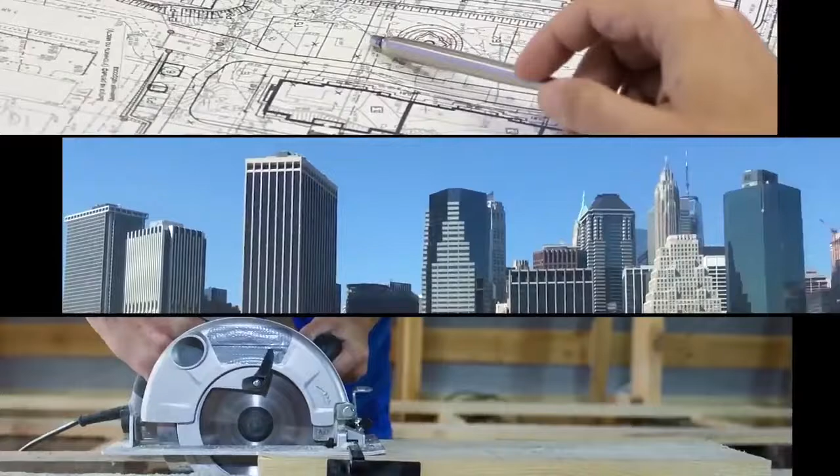In the United States, local governments, businesses, and individuals are working on inventive ways to curb carbon emissions in an often overlooked place, our homes. Zach Semke works at NK Architects, a company that specializes in a cutting-edge, energy-efficient building technology called Passive House. I'm a very active proponent, I guess, of Passive House because it's just clear to me that it's a very powerful way to transform buildings into a form of climate action.

In the clean energy space, we're seeing solar panels and wind just plummeting cost and performance rising really rapidly. We need to take a cue from that and harness science, essentially, to build better buildings. And that's what Passive House does. In order to meet the Paris Accord targets, we need to flatten out emissions by 2020 and then see emissions reduced by half every decade afterward.

The Paris Climate Agreement pledges to limit the rise in global temperature to well below 2 degrees Celsius. This ambitious goal will require a lot of cooperation, determination, and innovation. Reducing energy use in buildings will play a major part in this. According to the United Nations Environmental Programme, buildings use about 40% of global energy.

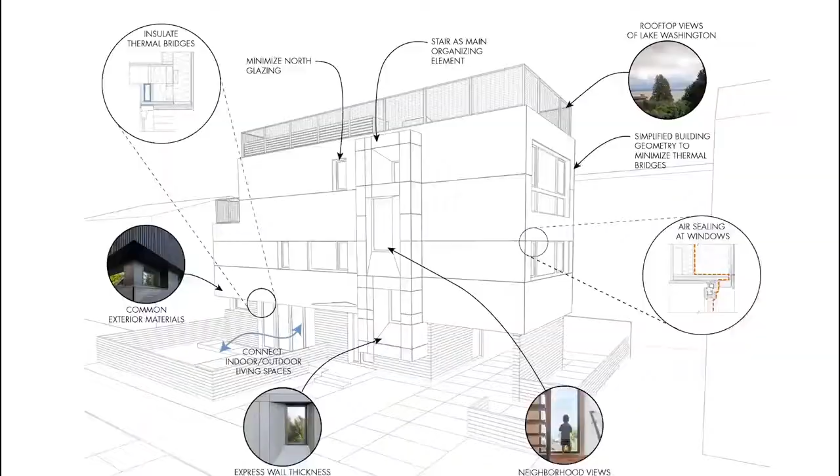Blocks the sun. I am an environmentalist. I was an engineer for about 10 years. I have been now in construction for about 10 or 11 years. I like to work with my hands, and I like construction a lot, and wanted to take it to sort of another level, to really do something meaningful in the community.

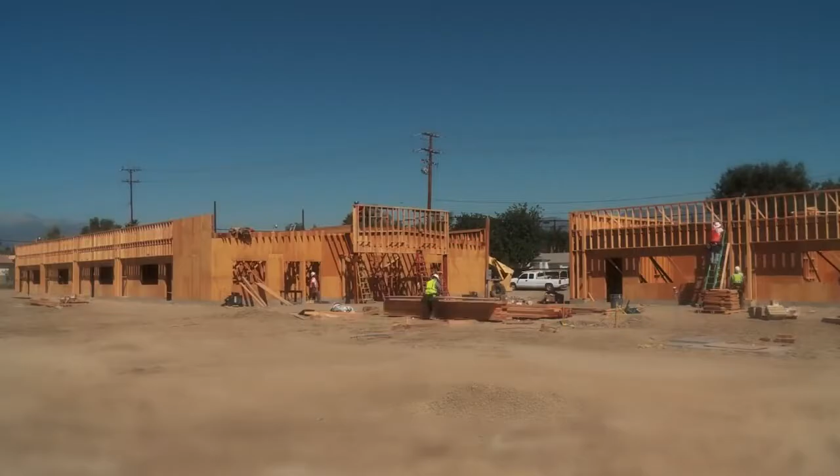Once you build a house, hopefully it's going to last for a very long time, and you kind of have one opportunity to really fix the energy consumption of the house. And you lock in that energy consumption for 100 years. And so for me, that was a very compelling idea. So we decided to do this house that way.

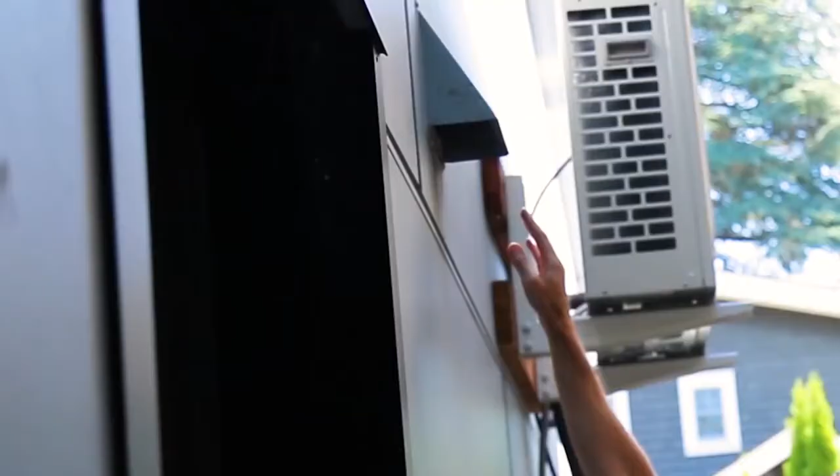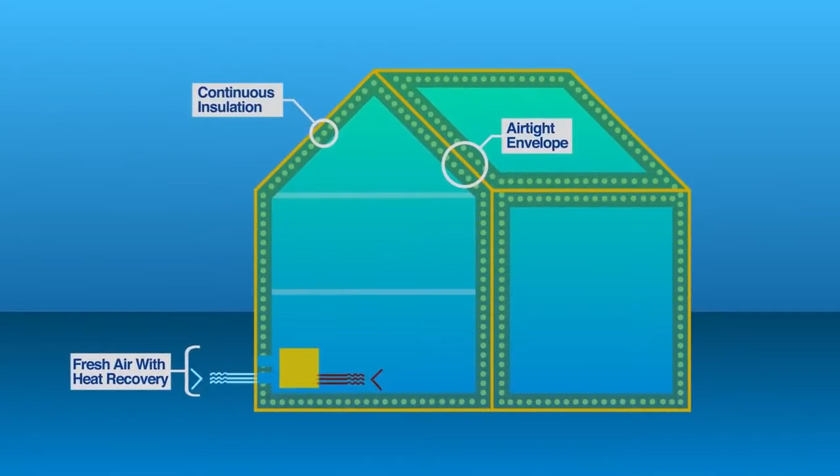So it is an airtight house, and so we have continuous ventilation. So we're delivering fresh air to the house all the time. A passive house uses what's called a building envelope to heavily control the air that gets in and out of a building. That means a super thick layer of insulation everywhere. Might be a little challenging to film in here.

So this is the heat recovery ventilator. It's bringing in incoming fresh air from outside, and it's filtering that air. So this is delivering fresh air to the house continually. Having continuously filtered fresh air takes the allergens out of the air, takes toxins out of the air. And I think the other part of it is it's much more comfortable.

Like in our old homes in the winter, you would be running the heat pretty constantly, and you would be bundled up. And so for us, we can just have on a t-shirt and a pair of jeans and flip-flops in our house all year round.

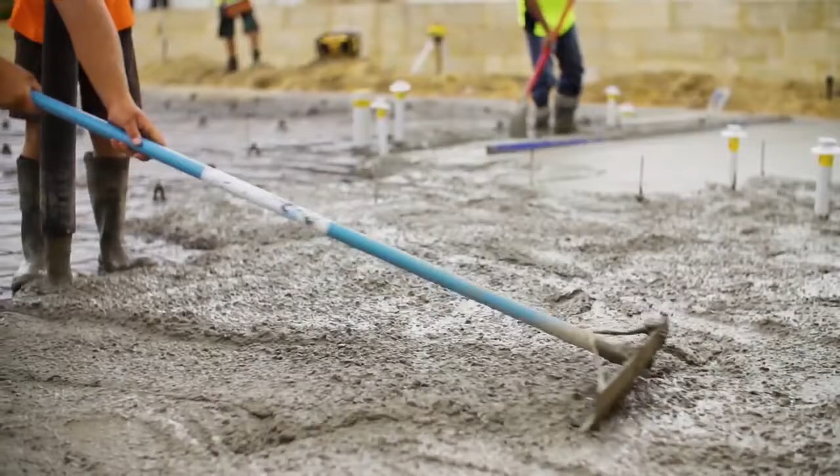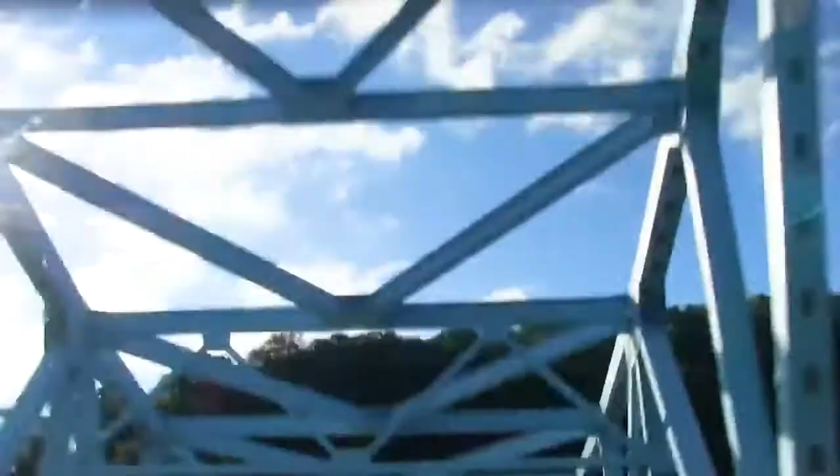On average, a passive house costs around 3 to 5% more than a conventional building, yet reduces energy use by up to 90%. In Pennsylvania, the state's housing agency has begun to incentivize passive house technology by giving builders a competitive edge in their affordable housing bids if they use it.

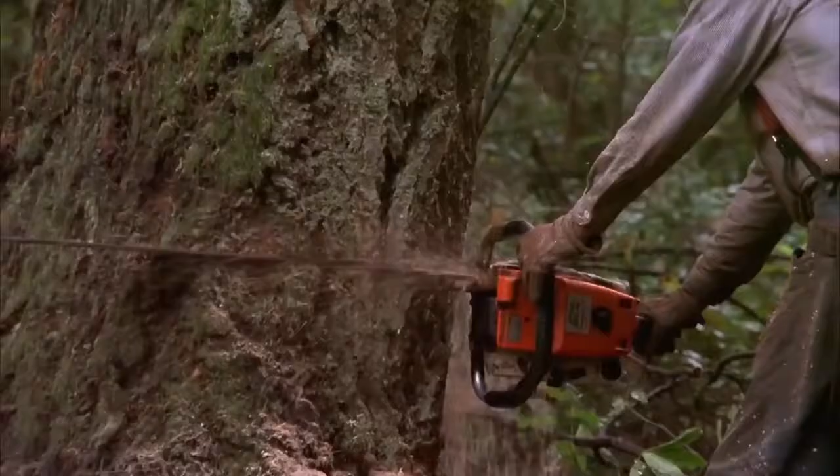The biggest threat that we face is climate change. I've always loved our planet. I love nature, I love our world. I see it slowly being eroded away on a whole variety of fronts, and it alarms me. Laura Nettleton, an architect in Pittsburgh, Pennsylvania, has recently been focusing on restoring old buildings to Passive House standards.

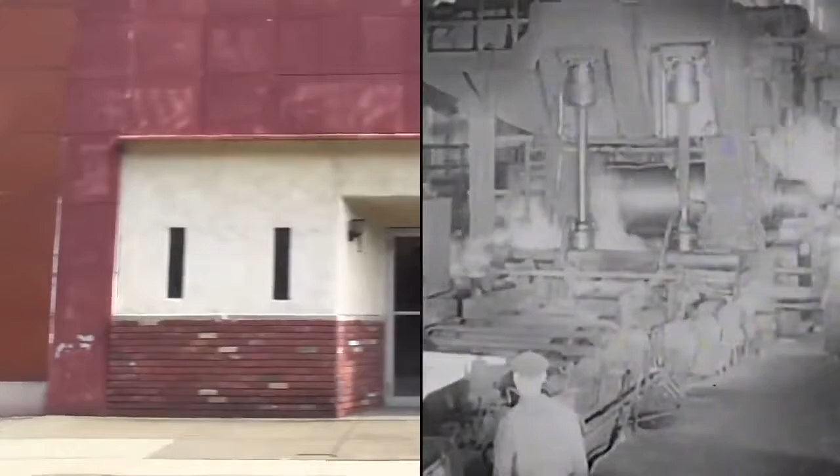We were called into McKeesport. This particular neighborhood, because of the reduction in steel production here, this community has kind of emptied out. This YMCA turned into a homeless shelter. And there were 72 residents living there, and the building was dilapidated and in poor condition. The ideal way to do retrofits is to put a sweater on the outside of the building, and that sweater's made of insulation and a new skin.

The best way to think about it is if I was asking you if you wanted to stand outside on a 15-degree day, all day, and I offered you 2 pieces of clothing. I gave you a snowsuit that went over your head and had mittens built in and went over your boots, or if I offered you a wool coat. And we both know which one you would take. You would take the snowsuit. And the snowsuit's designed to keep the cold air out. It's the same principle as Passive House.

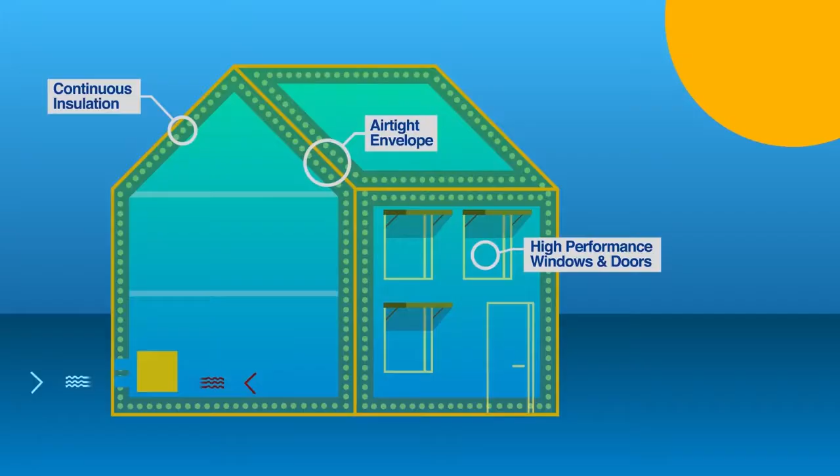And the same protection from a cold climate provides energy conservation in a hot one as well, reducing the need for air conditioning when temperatures run high. If you wrap your building in insulation carefully, then you can really conserve a lot of heat. We saved 68% of the energy from the original facility. So that was a huge reduction in energy.

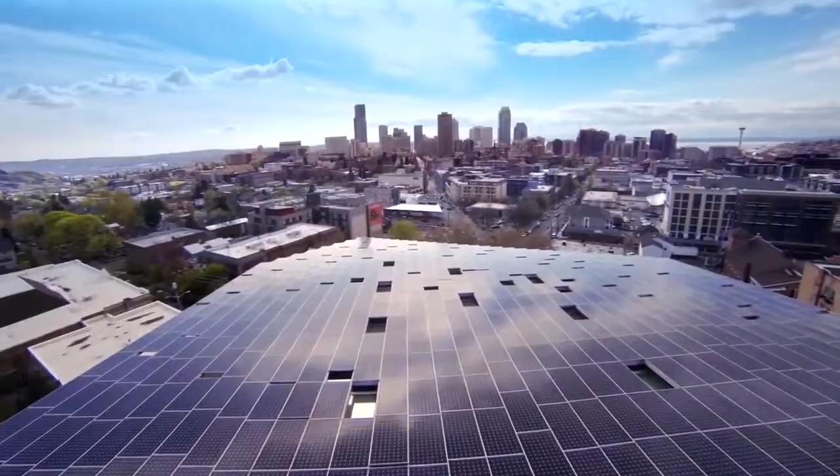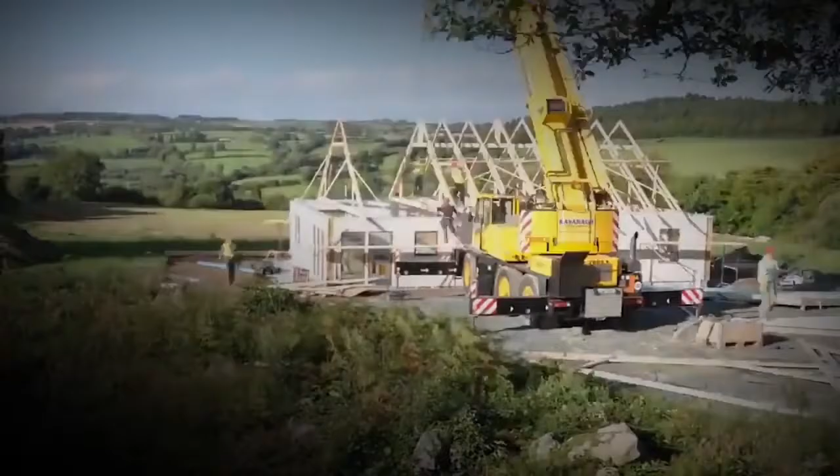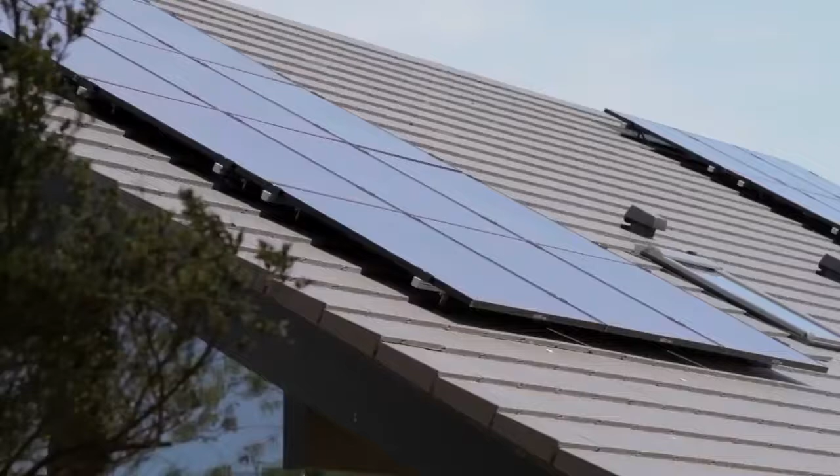The Passive House movement is really taking off across the Northeast and across the United States. Loic Chapeau works on conservation for multifamily buildings at NYSERDA, New York State's energy agency. So the first piece of the equation for me is really reducing the energy we consume. And once you reduce the energy you consume in your building by 50, 60, 70%, then it becomes much easier and possible to meet that energy demand with renewable energy, be it solar, be it wind farms.

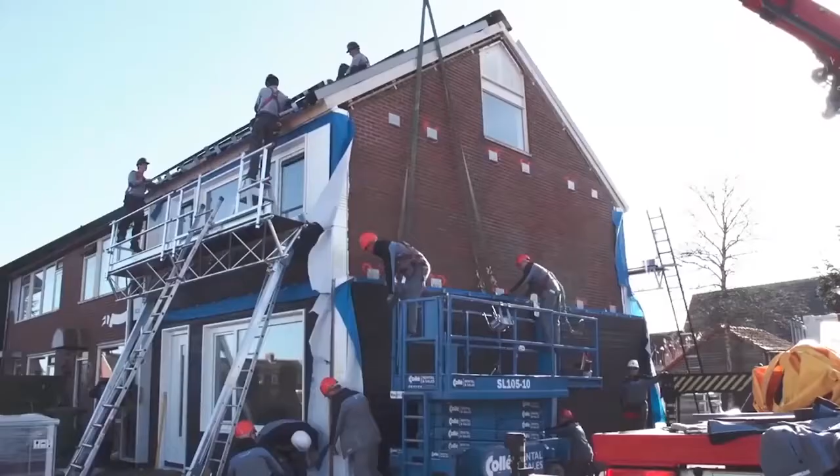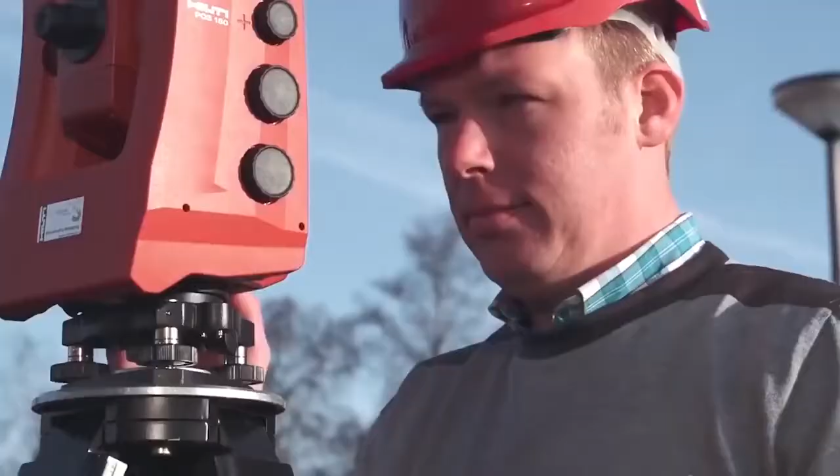What we are doing here in New York, we're trying to create a market to do very deep retrofits of existing buildings, learning a lot from a successful program that has been implemented in the Netherlands called Energiesprong. The Energiesprong program takes an existing building, puts a new well-insulated shell around it, and prepares the roof for solar panels. The energy efficiency principles behind it, like a super tight building envelope and continually circulating fresh air, are similar to Passive House.

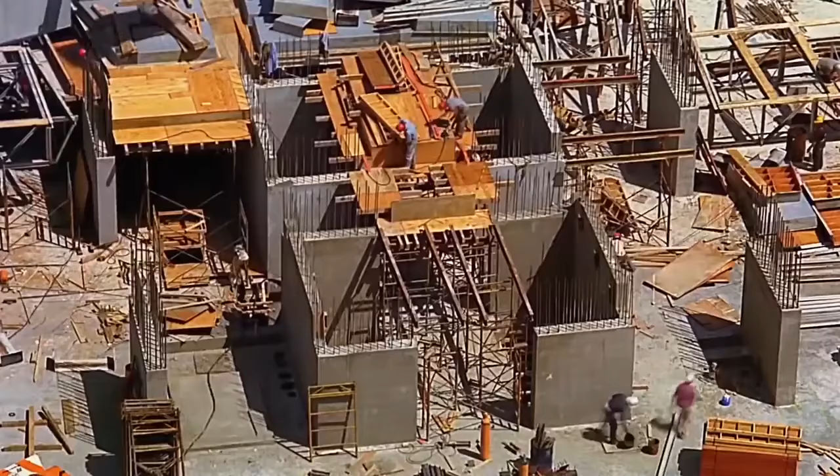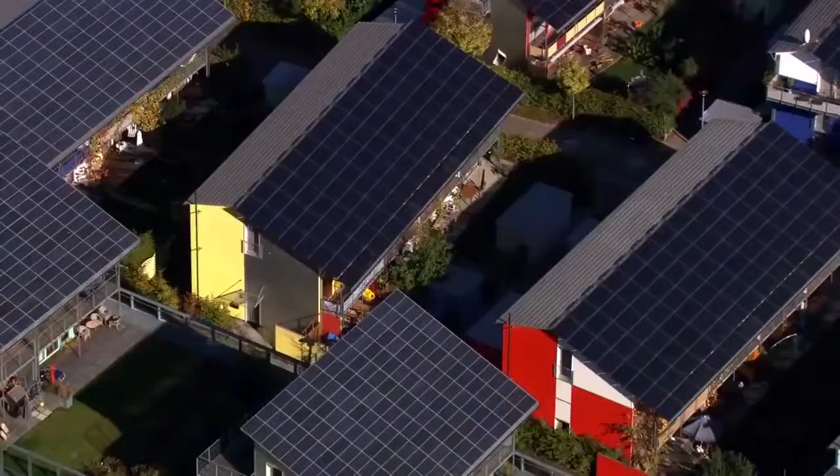NYSERDA is currently studying how to implement a system like Energiesprong or Passive House on a scale large enough to execute statewide. And in an effort to expand the reach of this technology, the Passive House Institute of the United States has begun working with their counterparts in China and Japan to foster sustainable architecture on a global level. There's a real possibility that Passive House could scale up quick enough to create a zero net carbon built environment by 2050, which is what we need to do.

I'm sure it was the same thing when the first houses had to be plumbed and have electricity. Oh, this is a stupid idea, and we're never going to be able to, it's too expensive, you know, right? I mean, it's the same thing. It's just we're working on how to make the energy more sensible.